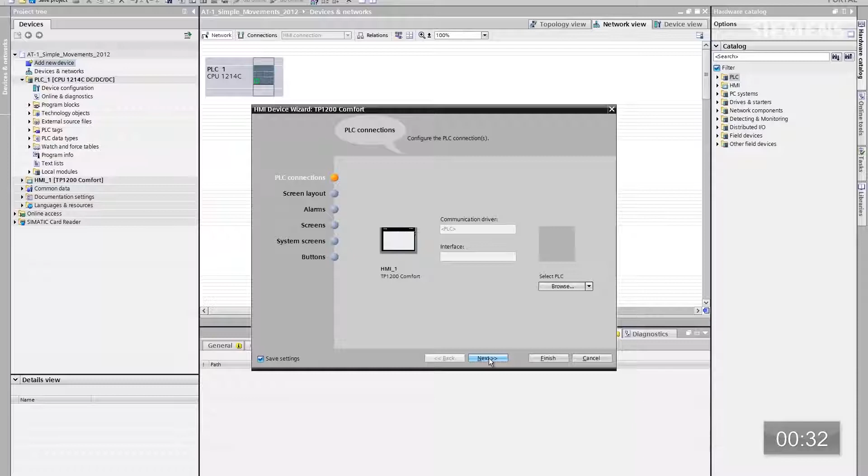You can change the background color here, screen title, navigation field, date, time, logo, whatever. We're going to leave those defaults. Here's the alarms. We're going to keep the defaults as well.

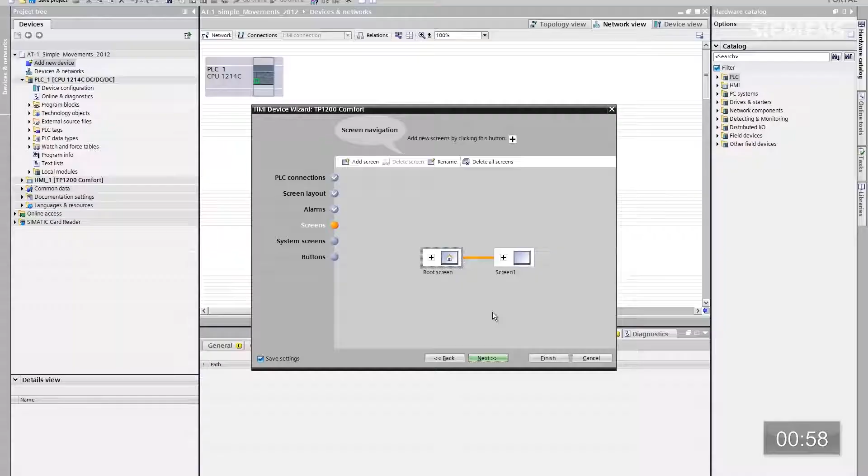The screens. Here you can actually create your standard architecture of your screens. That way every single time you have a new HMI you can easily go through the wizard and create those screens very fast and efficiently. We're going to leave root screen and screen 1, that's no problem. System screens, we're not going to use any.

And the buttons, as you can see, for instance, for this application I want to move them to the left instead of the bottom, and I can easily manipulate the system buttons back onto this with just dragging and dropping them on. And there are my system buttons on the left-hand side now.

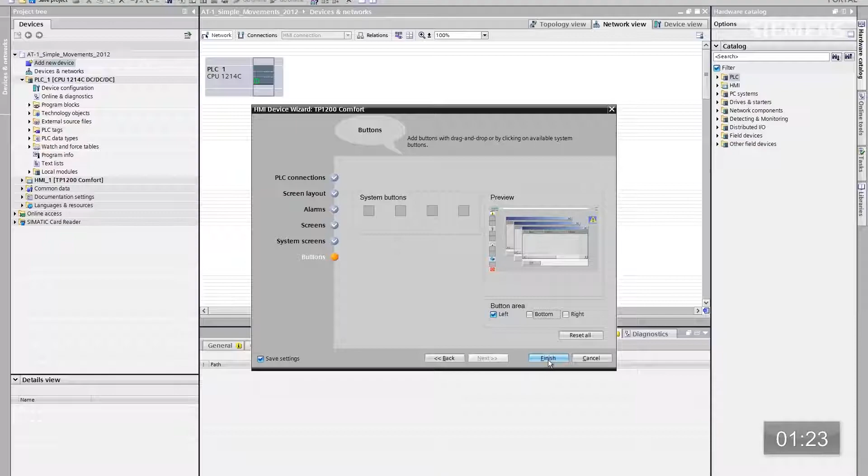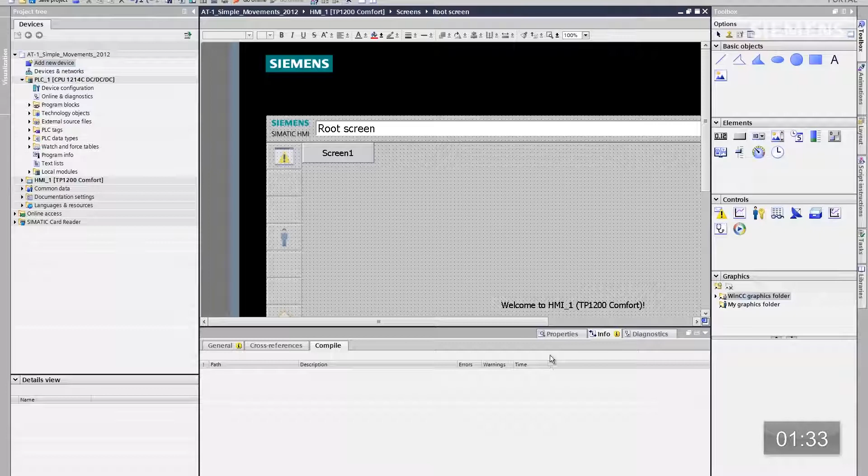At this point, I want to click on Finished. So ultimately, what the portal is going to do for us is give us a photorealistic view of this HMI and the screens we just created. Here they are. Let me minimize this and go to Fit to Screen.

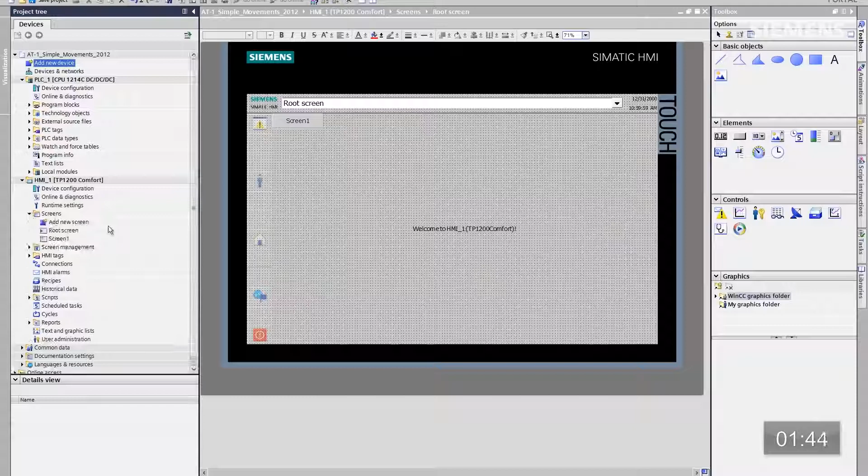So here's our root screen. If we want to add a new screen, all I got to do is go back here in the tree structure and just double click on Add New Screen. Again, it'll give us another photorealistic view of that new screen.

Click on Fit to Screen, and for instance, if you want to change an attribute of that screen, now that I have focus on it, I can right click on it, go to Properties, or if I want to change the name, that's what I want to do. Change it to 2. So now I have my root screen, screen 1, screen 2.

Okay, if I want to have navigation buttons for this root screen, all I have to do is drag and drop them on. There's root screen. There's screen 1. Now I've got my navigation buttons.

Okay. Now that I've accomplished the new screen and all the standard HMI architecture, what about actually tying it to the current code? Something I want to show you real quick. If I go back to Device and Networks, you'll see now I have my current automation architecture including the new HMI, but they haven't been networked together yet.

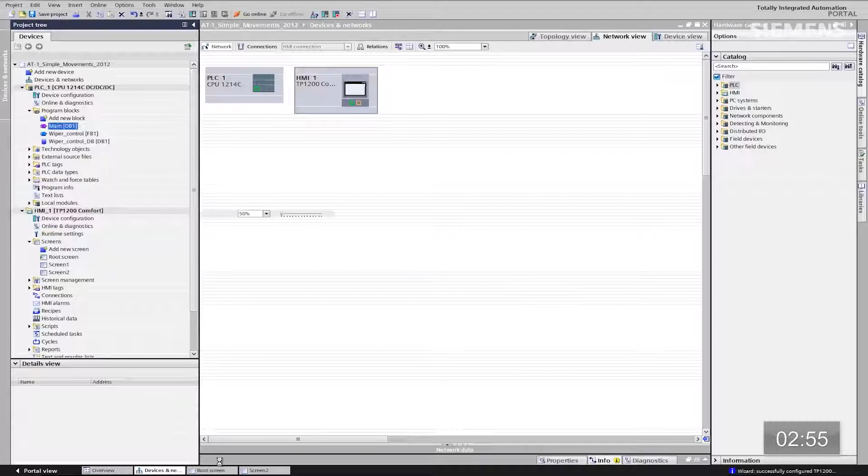Well, if I actually go back to the code of the current control system, program blocks, main OB, let's double click on that. Now that I have the code of the automation architecture, I want to give focus to the root screen and choose split screen. So now I have the actual brand new root screen as well as the code from the current automation architecture.

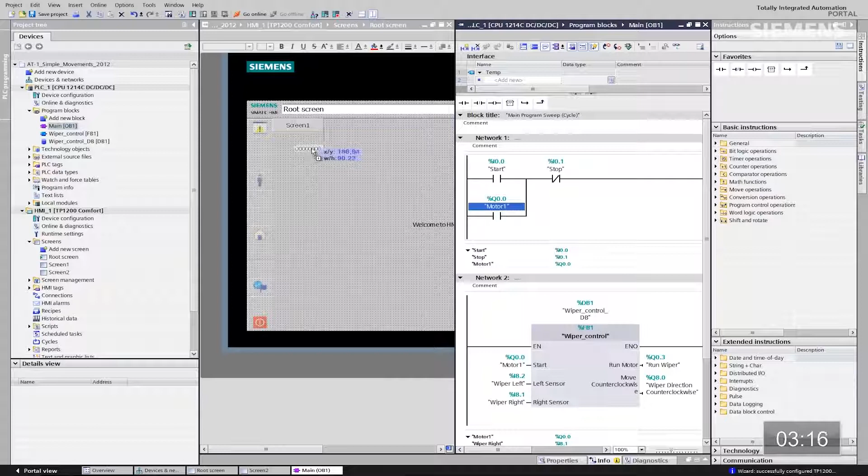If I want to tie them together, what I want to do is just go grab an I/O field from the code, drag and drop it on. And you see I get these little alignment bars just like you get when you do anything in PowerPoint. That way you can easily take boxes and make them align the way you want to.

If I want to resize, refit this I/O field, all I got to do is go grab one of the corners, drag it to wherever I want it to go. If I want to actually do an attribute change, just give focus to it, click on Properties.

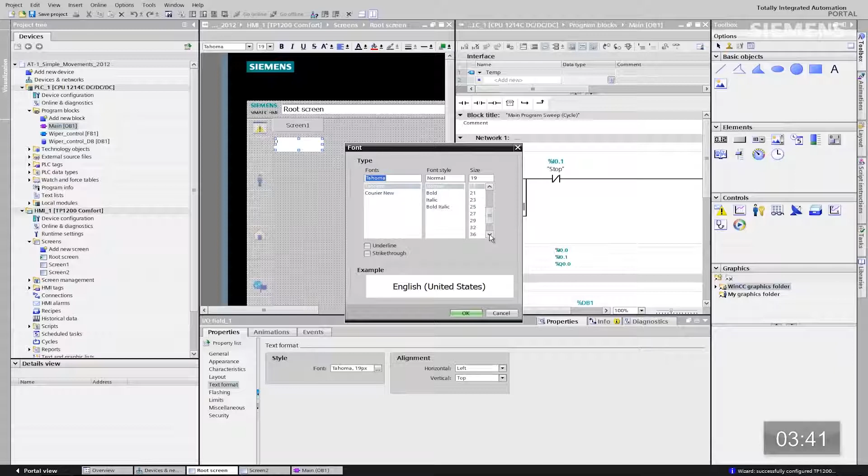Let's change the text size, for instance. Instead of 19, we want to use actually 32. Click OK, and I also want it to be centered. So now I've changed the attributes of this I/O field. Let me click off the split screen and let me show you the device and networks.

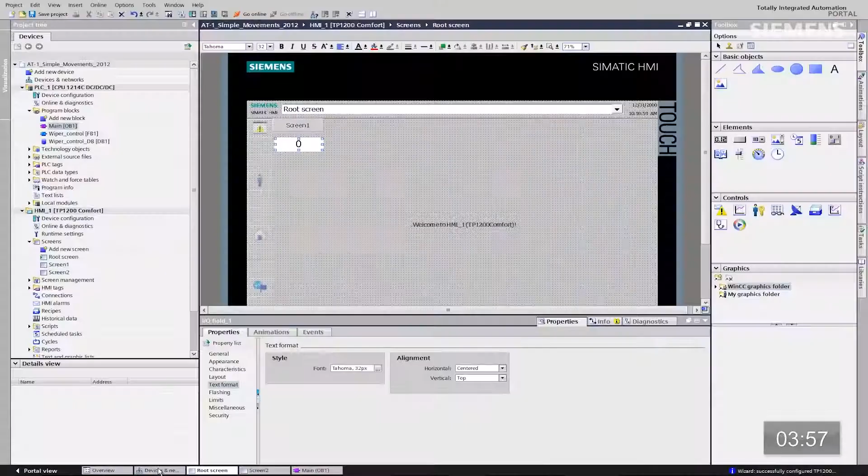So now if I click on this little icon here, Show Address Labels, the moment we pass that I/O field from the code to the actual HMI panel, it automatically created the Profinet network, the IP addresses, device names, including even the logical connections. It did everything in the background for us. That's how smart the portal really is.

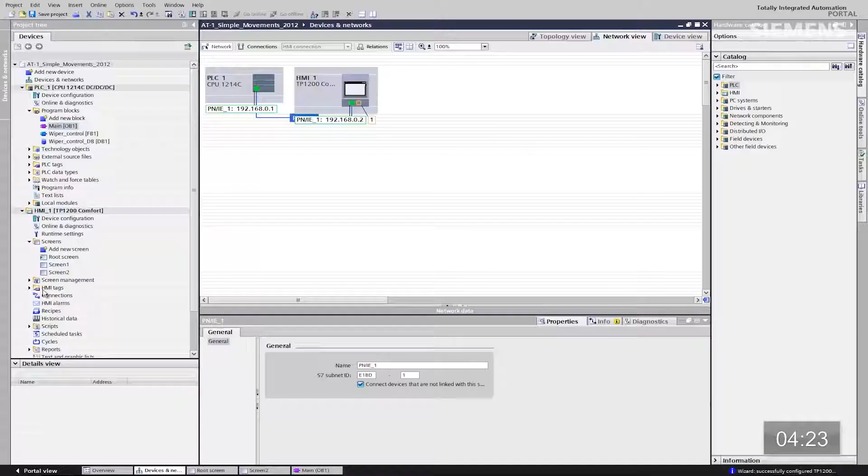Okay, so the network is now complete. How about the actual control? Let me go back to our root screen. Let me drop this down and let me go to our libraries.

So now I want to add buttons and switches. Let me give focus to that. So ultimately we're going to launch a library of different types of buttons and switches we could use for controlling. Now that we have them launched, let me go down to the rotary switches.

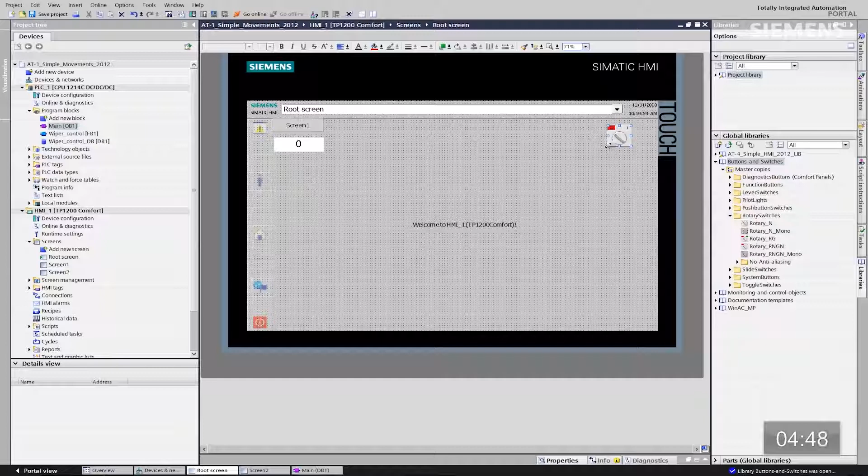Let me drag that on, resize, and refit however I like. Then I can use the alignment bars to make certain everything looks good on this HMI screen. Give it focus, right click, properties.

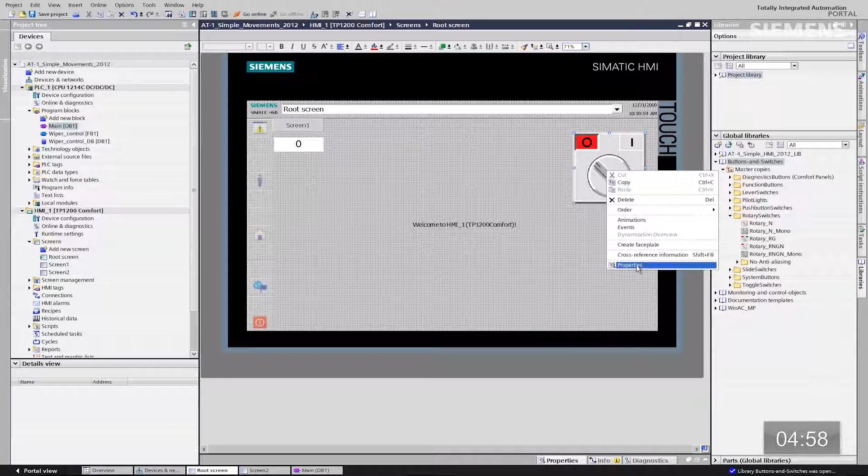I want to go to general, go to the tag, and since I know the code from the current automation system, I know exactly which tag to tie to this rotary switch so I have actual control between the two systems. Let's type motor 1, that's the one I want to use. Use smart type, there's the tag, so now our control code from this rotary switch to the actual code itself has been tied together.

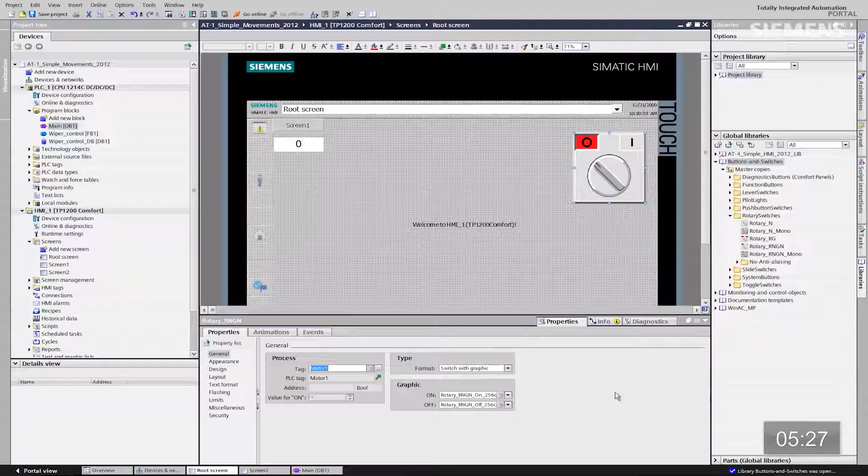Okay, how about animations? Let me give focus to this, and let's choose that library. We have the ability from the global library concept to take any kind of graphic or animation and make it exactly how you want on your HMI panel. Once you've done that, you can save it to global library, and every time you have a new HMI panel come online, you just drag it onto the panel and you're done. All you got to do is tie it to the code.

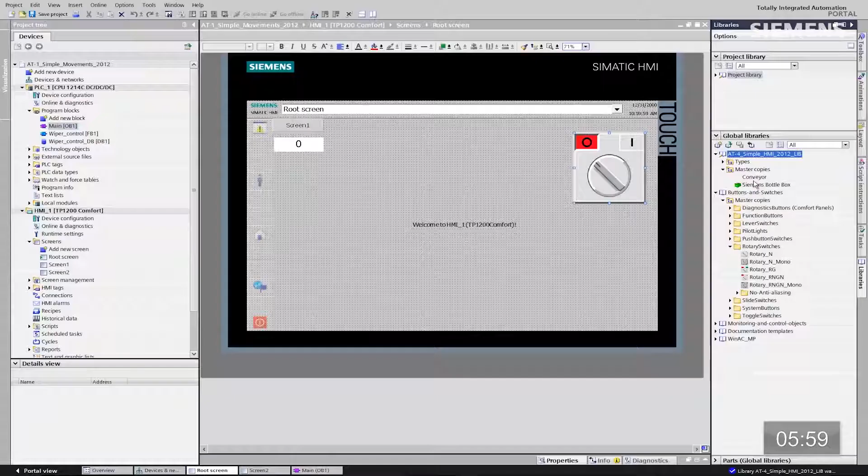Let's do exactly that. Let's drag this conveyor down, so we're going to have a conveyor on this panel. Resize, refit.

And I'm going to have a Siemens bottle box. Now that I have focus on it, I want to right click and go to properties, go to animations, and click on horizontal movements, so I can do an on-the-fly animation of a horizontal movement.

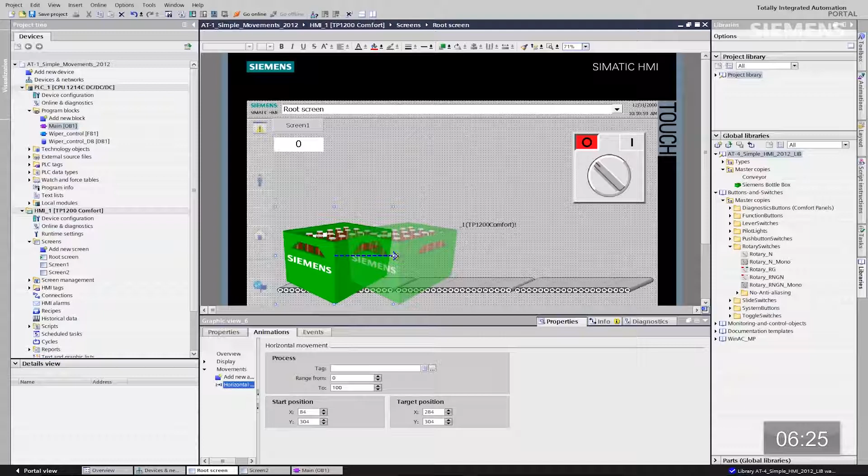It gives me a shadow box plus an arrow. If I go over here and give focus to it, drag that arrow over to the endpoint. So there's a point of start, there's a point of end, and this is going to be tied to an analog value.

So let me type 27,000 because this will be an analog word, and the start point is going to be 1,000. However, I don't have a tag I want to use from our analog inputs, so let's go do that first.

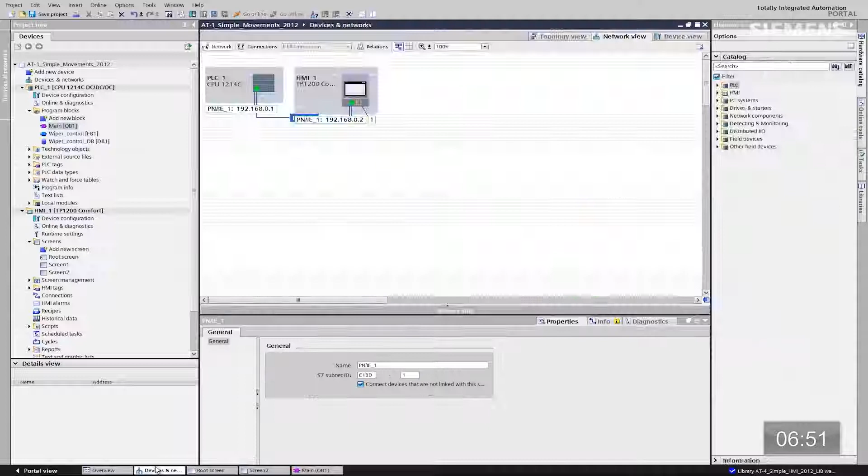Let's go back to our devices and networks. Give focus to the actual CPU, click on device view, now give focus to the analog card, and you'll see that we have analog input word 112. That's the one I want to use. I'll also go back to a plus or minus 10 volts so that I have a full range of that analog word.

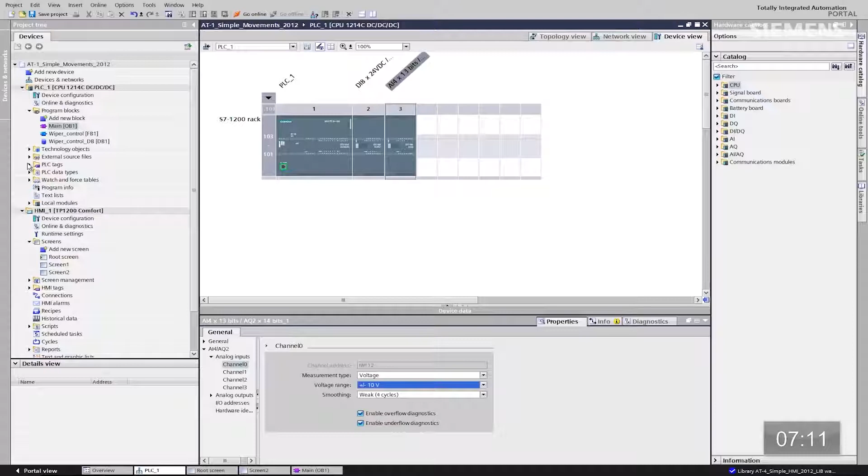Let's go to our tags, show all tags. As you can see here, all I have to do is type IW112 and click enter. At this point, the tags will give you the possibility of creating the actual data type as well as the tag name for that analog word automatically. You don't have to do anything. I'm going to use this current tag it auto-created for me.

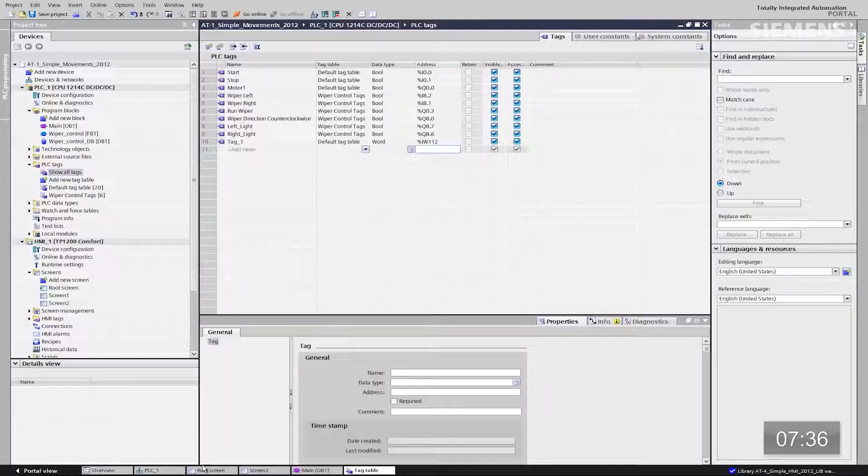That's fine. Let's go back to the root screen. Give focus to the actual bottle box, click on animations, and just click tag. Smart type, there is the tag 1, that's what I want to use.

At this point, I can give focus back to the CPU and click the download arrow button. What the system will do now is go out and search the network to try to find this automation system. It's going to give us a dialog box over Profinet. It's searching, and it has found the IP address of that controller.

I can actually click on the flash LED button, so now I've clicked on that. It's going to go back out over Profinet. It is the correct controller at this point, so I can click the load button.

So now what it'll do is a quick compilation of this analog word and this tag and the logical connection over Profinet to the control system for us. Click on load. Now we've loaded that simple connection.

What I want to do now is give focus to the HMI, and you'll see this little box up here is called Start Simulation. I'm clicking on this. Ultimately, we have the ability to virtualize an HMI panel. You don't have to have the physical hardware to do it. We can tie that directly to the automation system and prove out that the system works before you have to actually go out and buy the hardware.

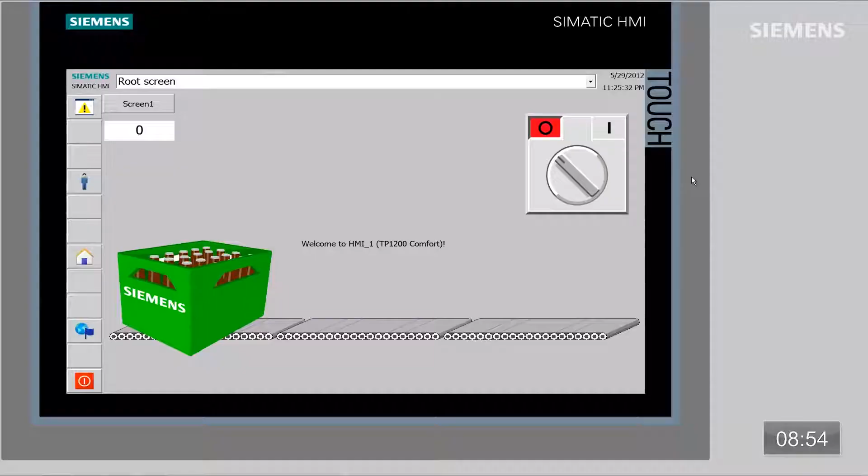Let me give complete focus to it, so you can see here we have the virtualized panel at this point. Our bit field is 0 and our switch is in the off position. If I click on the switch, you can see our motor is running now and our bit field's gone to 1, so that means we are in run mode. If I turn that switch off, you can see everything has gone back to a steady state and it's stopped.

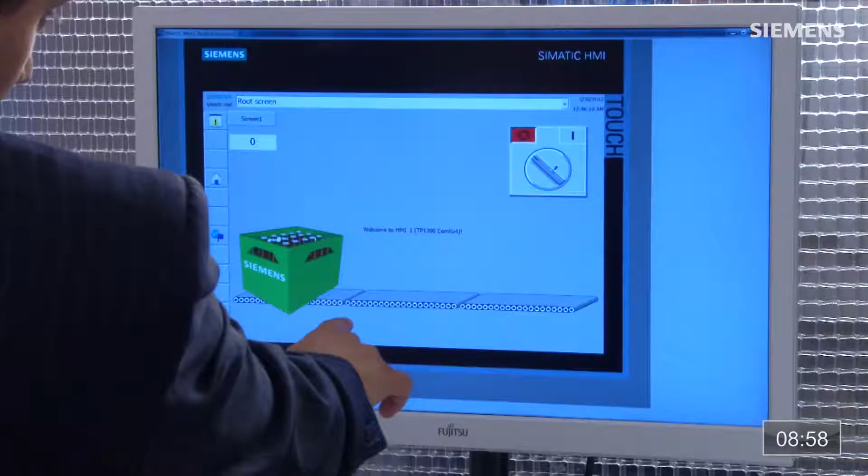If I come back to the analog potentiometer, I can move the bottle box and I'm able to do the entire animation of this bottle box, including all this HMI. I did it in a matter of minutes. Now that's engineering efficiency.